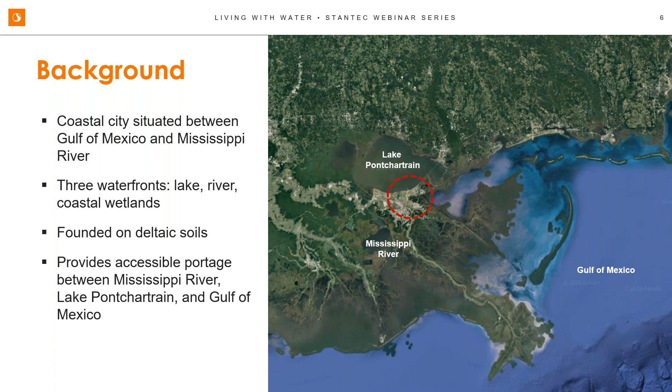Okay, and there's New Orleans on the map, you can see it in the red circle. It's surrounded by water with the Gulf of Mexico on one side, Lake Pontchartrain on the other, and then the Mississippi River that snakes through the city as well. The city was founded on deltaic soils, really soft marsh swampland, and we've dried up some of those swamps to create the city. Being surrounded by all these waterfronts really causes some challenges for the city, and over the years it's been the Mississippi River or hurricanes that have posed a lot of challenge to the city, with flooding events and disasters.

Just to give you an idea of the terrain, on one side's the Mississippi, you see Lake Pontchartrain on the other side, and basically New Orleans is in a big bowl. It's below sea level, at times 10 to 15 feet below. You can see where the blue-green corridors of the Gentilly Resilience District lie, at one of the lowest parts of the city. The whole city is protected by flood walls and levees along the Mississippi River and Lake Pontchartrain. Over the years, when a disaster happens, you get a Mississippi River flood or a hurricane that surges the lake, and it fills the bowl. When we've had breakages, those disasters have happened, and we've built higher and made the system more resilient.

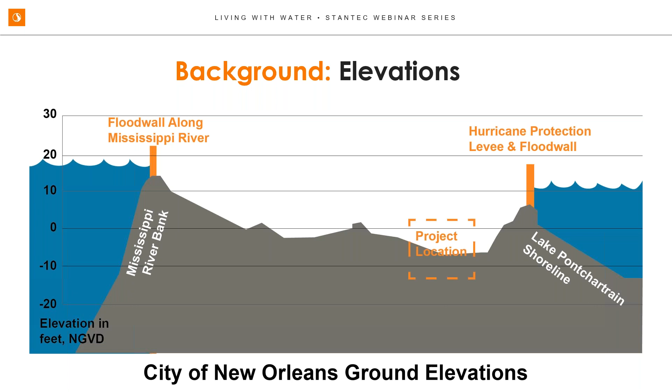In the 20th century, a drainage system was built with pumps, levees, and canals, allowing development of land that wasn't developable before and controlling flooding that was previously uncontrolled. These were giant pumps, some still in operation today, and New Orleans became the model for other areas on how to handle stormwater and control these large flood events. It allowed us to develop areas like Gentilly, which was really a swamp. It's one of the largest pumping systems in the world, over 50,000 CFS for the entire system, and it was strengthened over time.

But even with all this pumping capacity and these giant pumps, the system can still be overwhelmed because New Orleans is in an area that gets really strong rain events. We get over 55 inches of rain per year, and some really intense storm events.

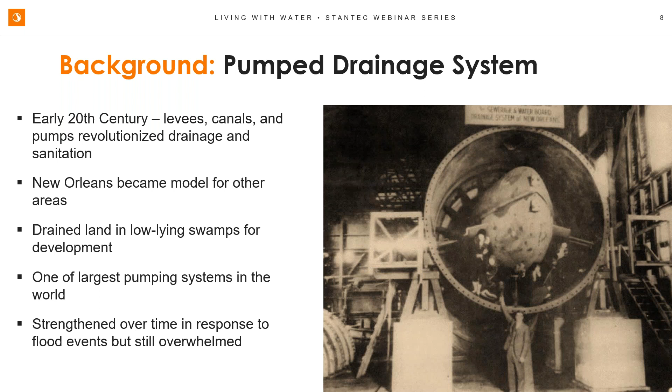As New Orleans was developed, the pumps, though powerful and able to evacuate a lot of water over time, can be overwhelmed by really intense storms, causing a lot of flooding and damage within the neighborhoods. What you're seeing here is a hydrograph of what the pump station sees. Before everything was developed, with roads, houses, and impervious areas, that blue line represents what the pumps would have normally seen. As things got developed and there were fewer places for water to go, you can see how the peak goes up. Part of the philosophy behind this project and green infrastructure in general is to get back to that natural hydrograph, reducing the peak and flooding by spreading out when the rain events happen and what the pump sees in the end.

One other thing that's really been a stressor to New Orleans over time is sea level rise, and more intense storm events. We've gotten really intense storm events, especially in the last 5 or 10 years. There was a storm event that gave us about 8 inches in 2 hours in a big part of the city, causing a lot of damage and flooding, and that was only a couple of years ago. So we've been seeing these 100-year, 500-year storms, which you wouldn't expect to see very often, occurring a lot more frequently.

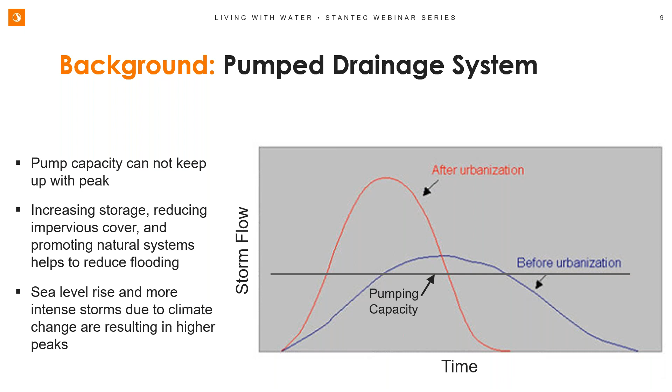In 2005, everything changed with Katrina. There were over 1,833 deaths of people who lost their lives. It's interesting because the evacuation was actually really successful, about 99% of people were evacuated. But the people left behind had nowhere to go, and in some cases there was about 15 feet of flooding in their neighborhoods, and they just couldn't get high enough in their houses. There were 50 levee breaches, and about $81 billion in property damages resulted from the storm. You can see right there on 17th Street, that was one of the big levee breaks.

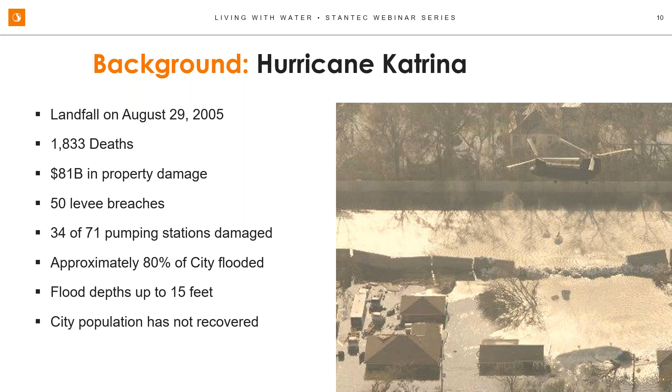The levee basically fell apart, and all the water from Lake Pontchartrain just poured right into the bowl and filled it up right up to sea level. Approximately 80% of the city was flooded, and the pumping system was basically useless because it was all flooded, the electrical systems were flooded, and the operators weren't able to operate the system.

This isn't a historical thing, we see this threat from hurricanes every season. This hurricane season we've been in the cone of uncertainty 8 times and got hit a couple times. This last one caused a lot of power damage with trees and branches falling. Luckily we didn't get hit with something major catastrophic, but our residents always live with the fear of when the next storm is coming. We know at one point one of these big storms is coming, so we always have to build things with resilience in mind.

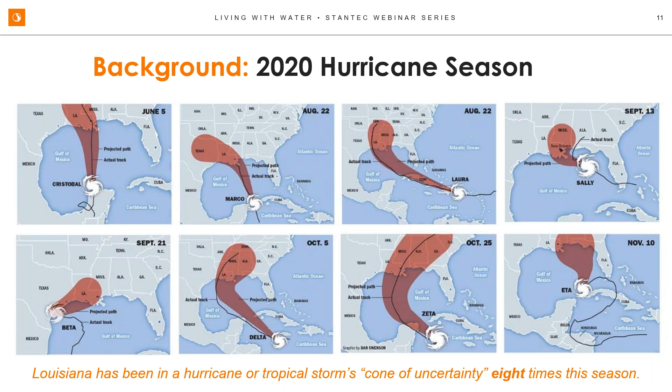Some of the physical stressors we have: the red line around the city is pretty much the city of New Orleans and the hurricane risk reduction system, which is a combination of levees, flood walls, and pump stations. There are some gates that close up, and all the rain that falls within the system needs to be pumped up and over the levees.

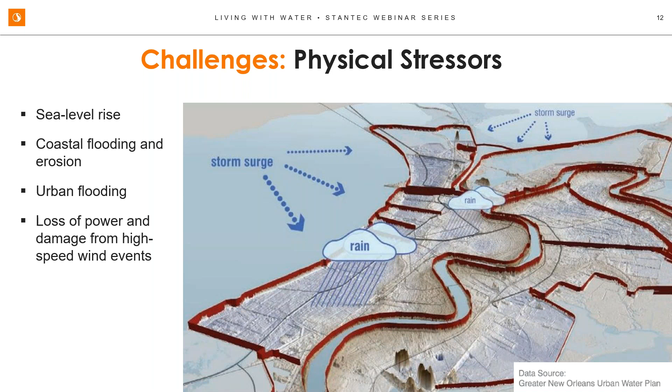Some of the stressors we have are sea level rise, coastal flooding and erosion. There are marshlands south of New Orleans which historically protected the city from hurricane surges, and that has been eaten away over time. There's urban flooding as these more frequent storms happen, and as I mentioned, loss of power. We spent a week and a half without power last month based on a hurricane that came through here, pretty much the entire city.

Another challenge we have is subsidence and the sinking delta soils. What we've always tried to do here in New Orleans is pump the water out as fast as possible to get it out so it doesn't cause flood damage. What that's caused is those marsh soils, those organic soils, to dry up, and as they dry up they cause subsidence. You can see it in our roads, our houses, even sidewalks that settle. That's a big issue we have to deal with, and this project tries to find solutions for that as well.

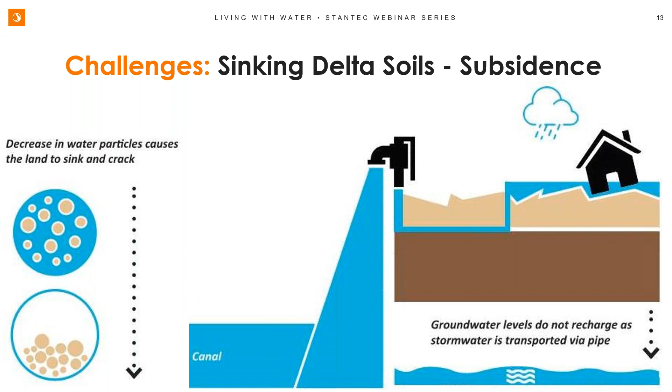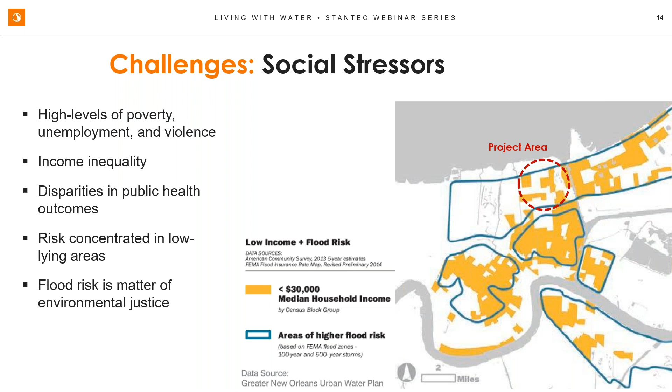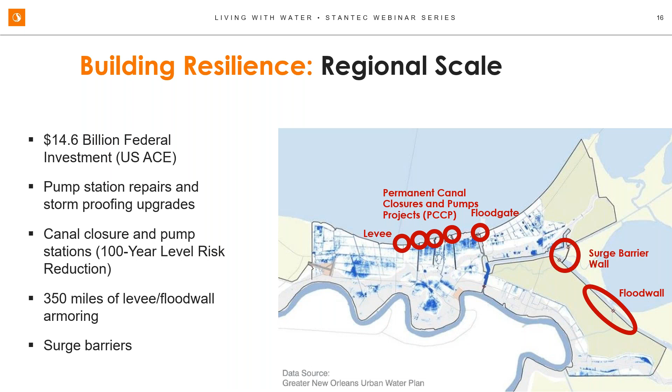Let's talk a little bit about building resilience. When Katrina hit, the Army Corps of Engineers and federal government put in $14.6 billion. The state and New Orleans also put in funding for smaller projects, but this was basically to reinforce that ring around the hurricane risk reduction system around New Orleans. About 350 miles of levee and flood wall were strengthened. There were canal closures—really all the levee breaks happened in those 3 canals you see under the red circles, 17th Street, Orleans, and London. The protection was pushed out to the lake to ensure that didn't happen again. There were also pump stations and other big projects done within that $14.6 billion, basically to build back stronger and have a higher level, 100-year level of risk reduction for the city, at a regional scale.

And to give you an idea of that capacity, that is a lot of water coming through. It's 3 big canals, drainage canals that drain the whole city, and that fills an Olympic-sized swimming pool in 4 seconds. So it's a lot of water.

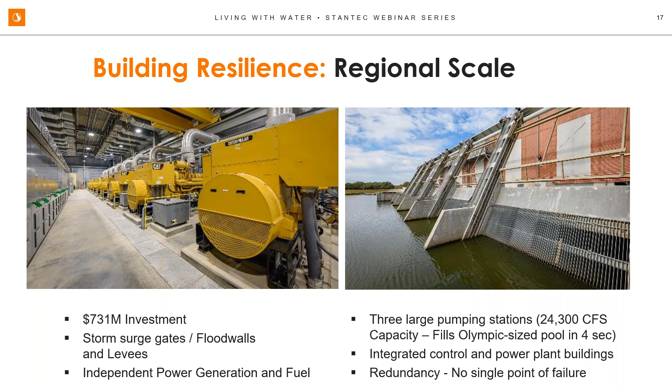These facilities were built to make sure that Katrina didn't happen again. They have independent power generation and fuel so the facility could be separate from the rest of the world for 5 days and operate. It has a lot of redundancy built in, and what we didn't want to have is a single point of failure. So all the electrical and mechanical systems have backups to make sure this facility could work when it's actually needed during a hurricane.

Go to the next slide.

But the city has been looking at alternate solutions and better ways of being resilient. One of the ways is moving from a completely gray system to a combination of gray and green infrastructure. I mentioned that things were being pumped out as quick as they came in. Well, green infrastructure slows things down and tries to smooth out that hydrograph at the peak of the storm by providing storage on the inside of the system.

One project that is about to finalize construction is Hagan Lafitte, and it includes a combination of gray system piping and reallocation of the basins plus green infrastructure to provide a complete system. We've seen reductions of flooding up to 4 feet in what's modeled. And that includes porous pavement, rain gardens, park upgrades, basically providing pervious areas wherever the neighborhood offers opportunities.

Go to the next slide.

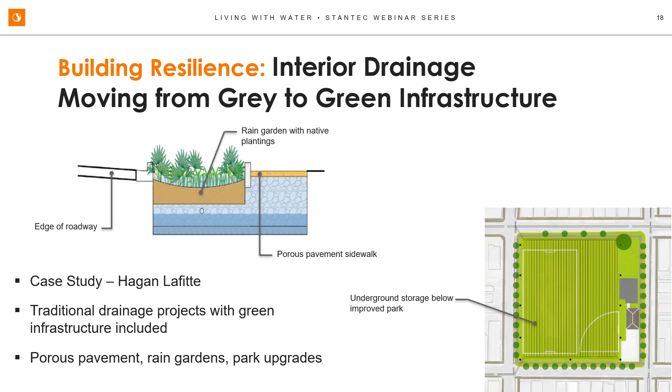So let's talk a little bit about the plan in action and blue-green corridors and how it relates. That's kind of giving you a little bit of history and background. Now, the city applied for NDRC, National Disaster Resilience Competition. This is a competitive grant funding to recover from past disasters. So in order to qualify, you needed to have had a past disaster happen in your city. But the focus of the grant is to improve the ability to withstand future events, future hurricanes, and to be resilient, to come back quicker.

And it really focused on the physical adaptation, which are physical improvements we can make to the system, but also on economic opportunity and on social cohesion. So it's a HUD grant, and it's not just flood reduction. It focuses on really bringing the community back and focusing in on different aspects of resilience.

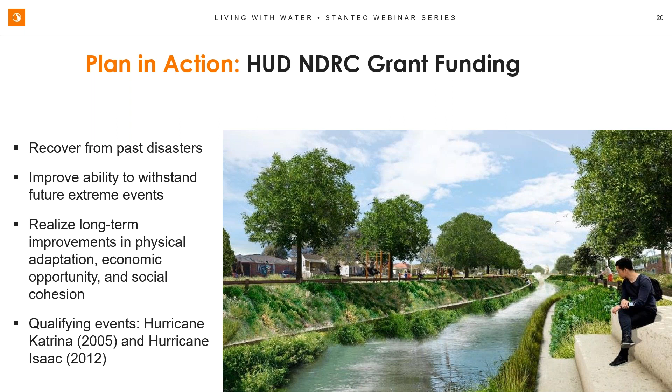If you go to the next slide.

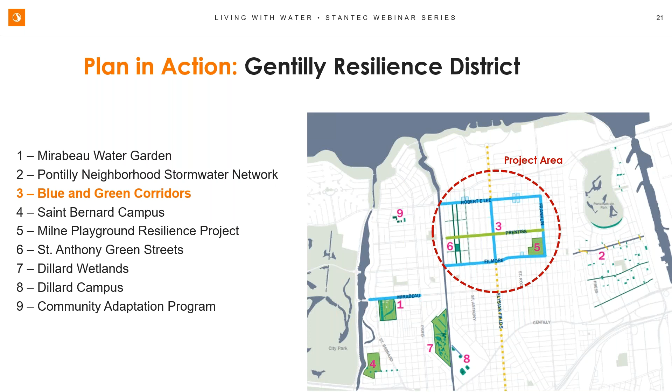If you go to the next one, some of the goals that were provided in the application and the program.

The biggest goal is to address the flooding and also to promote infiltration and groundwater recharge, which are ways to help with the subsidence problem. So you want to try to get the water and slow it down, create storage in the system, and reintroduce it back into the aquifer.

But HUD also had other goals. It wasn't just the drainage, it was public health goals, to provide access to parks, provide recreation, amenities, health stations for people to be able to get out and exercise.

Economic goals, we wanted to have this community thrive again, right? Develop economic growth, have opportunities for people that maybe left from Katrina to want to come back because it's such a great place.

And then urban heat goals, also create shade and reduce heat island effect. New Orleans, it's summer like 9 months out of the year. So heat island effect is big in some of these areas that are overdeveloped.

And then also cultural goals. The program wants to capitalize on the rich culture that New Orleans has and bring some of that culture into these parks, into these installations, and also provide some interactive educational opportunities so they can understand what's happening with their drainage or some of the other installations that are going in.

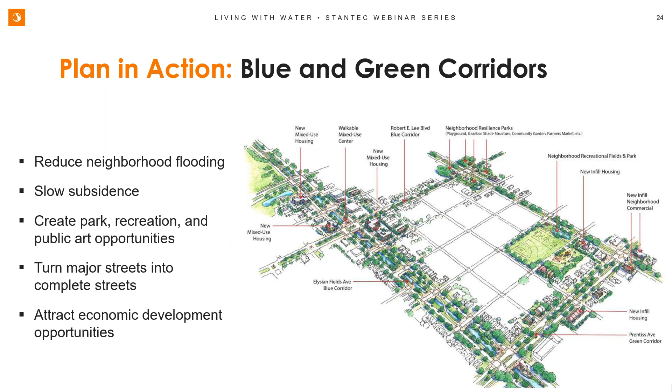So really this project is a shift in thinking of how can we use nature-based practices to capture the water where it falls and promote infiltration back into the ground, while creating park and neighborhood amenities, providing safer routes for pedestrians and bicyclists in complete street thinking, and attracting economic development opportunities. So the intent is to manage water more successfully and to maximize the funding to provide the most amount of benefits for the community.

Blue and Green Corridors is the largest of the Gentilly resiliency projects. It's a $40 million construction budget with a significant amount of roadway. On the screen you see Robert E. Lee Boulevard and Filmore Avenue, the east-west streets, roughly between London Avenue Canal - one of the canals that had a severe issue during Katrina - to Franklin Avenue on the east, and then Elysian Fields Avenue going in the north-south direction. That's about 3 miles of linear corridors that we have to work with.

We're also looking at 2 stormwater parks at Robert E. Lee and St. Anthony Avenue, and then 4 stormwater parks at St. Roch and Robert E. Lee Boulevard. Currently those are vacant grass lots. There are some trees on them that we'll preserve, but with those lots we'll really be looking at ways to use strategic storage to work within the system.

In addition to flood management, these corridors will be used as stormwater management facilities - I'll go into how we're doing that in a few minutes. But beyond that, we're looking at how we can make the most of the money we have. Within these corridors there will be improved planting, so instead of turf we're putting back grasses and shrubs and practices that promote infiltration into the ground, using nature to reduce the volume of water while also providing a water quality benefit. We're introducing lots of trees, playgrounds, and fitness areas, all with the intent of creating an amenity within a 10-minute walk for everybody in the neighborhood, not just at the stormwater parks.

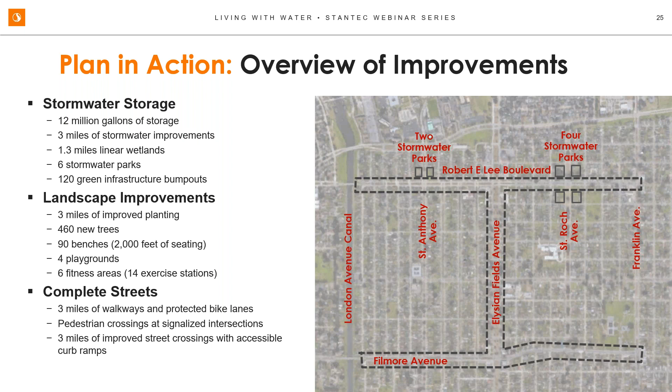As Dan mentioned, Gentilly is an area within New Orleans that has seen tons of flooding over the years, not just from these large hurricanes we've been seeing so much, but really from daily storm events as well. They get over 55, 60 inches of rainfall a year. So really it's looking at how can we deal with water in this bowl-shaped community that's sinking more and more every day.

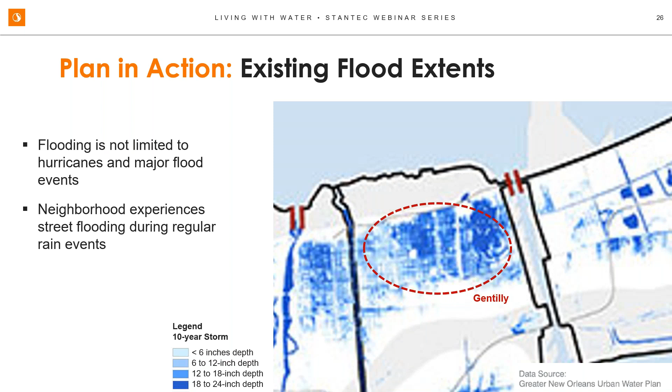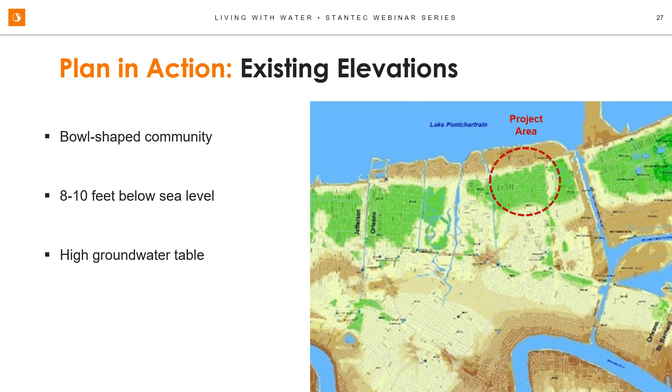This is a map showing the topography of the area. The darker green areas show the areas that are furthest below sea level. Gentilly in general is about 8 to 10 feet below sea level and surrounded by levees and flood walls on all sides. They're also dealing with a high groundwater table, one that's regulated by these pumping facilities. We see groundwater maybe between 4 and 6 feet below surface grade. So that really presents a challenge as well: how do we strategically collect this rainwater and get it back into the ground?

The pumping system in New Orleans is very specific to this area. Again, it's that bowl-shaped community with perimeter controls around the outside. So when we get rain from a regular storm event, the issue becomes how do we deal with that rain? In the existing model, water is collected in catch basins or inlets on the street, routed into small pipes, then into larger pipes, into underground canals, Prentiss Avenue being one of them, and then eventually making its way to a pump station where it's pumped up into an above ground canal, in this case the London Avenue Canal, and directed north to Lake Pontchartrain. So it's really a single source stormwater management system.

And this shift in thinking that we're looking at is how can we collect water where it falls and strategically use that storage to prevent strain on the pumping system? So how can we remove impervious cover and promote infiltration into the ground so that water doesn't make its way into the storm network system?

Again, on the right side of the screen is an approximate area of the project where we're really looking at finding strategic ways to pull that water out of the system during the peak of the storm event. As Dan mentioned with that hydrograph, really the peak is what we're trying to manage here, because that's what's resulting in this nuisance flooding that we see so often. So if we can create these strategic storage areas that temporarily hold the water, there's a lot of value in that, so they can be released back into the storm system after the peak of the storm has passed.

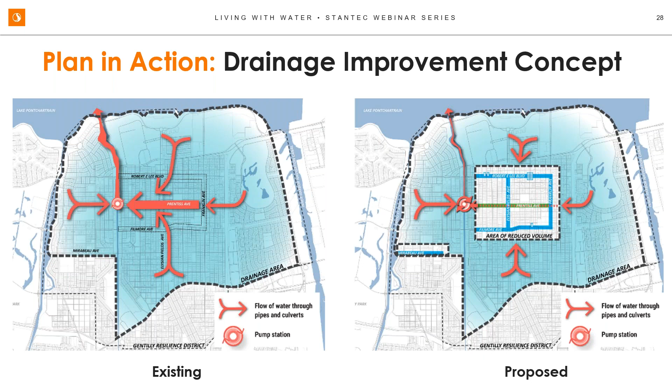So we've talked about blue and green corridors as the project name, but I want to talk through what this really means. Blue corridor is really a new concept: the idea of a permanent pool of water that's used for flood management.

In the top there, the existing condition really shows clearly why we have an issue here. In most cases in New Orleans, there are streets divided by medians or neutral grounds, grassed areas that are mounded and push the water back toward the edge of the street, where it's collected in inlets and catch basins and then routed to those pump stations. Unfortunately, the neutral grounds don't really provide much benefit for us here. They are pervious, which is good, and that promotes a little infiltration back into the ground, but really they're not used in any way for flood management.

In our proposed design, what we're planning to do is shift the water from the inlets back into the median, so excavate 10, 12 feet below the existing grade to really create a permanent pool of water, a depth of maybe 4 to 6 feet, and then provide a little bit of freeboard on top of that, another 4 feet or so, to handle those flood waters.

Now, the interesting thing here is that it's not just a drainage ditch. It's really something we're trying to create an amenity out of, to tie down on those triple bottom line benefits that Dan mentioned. So flood management, but also looking at the social value of adding a waterway into an area that — New Orleans is interesting because they're surrounded by water on all sides, and the city has its identity built on water. But once you're inside these neighborhoods, you realize you're surrounded by concrete levees and flood walls all over the place. There really isn't that feel or sense of water. So this is really an innovative and creative way to invite water back into the community.

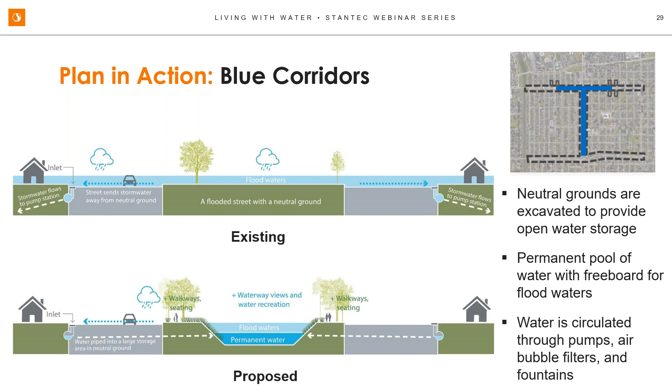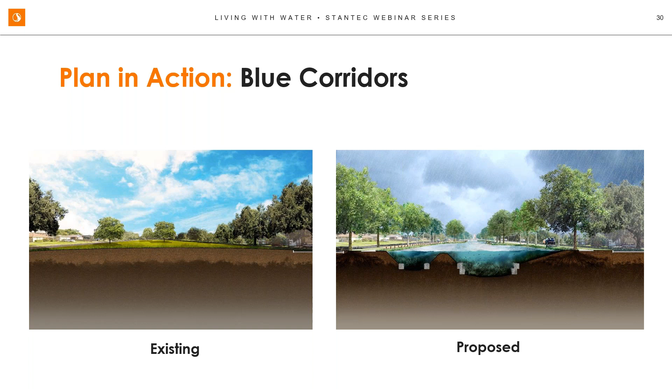Green corridors are corridors that we're retrofitting with green infrastructure technology. In these cases, they weren't able to be blue corridors based on the width of the existing neutral ground or based on existing utility conflicts that prevented us from digging down quite as deep as we did on Elysian Fields.

Again, in the existing condition, the neutral ground is slightly elevated and is pushing water back to the edge of the roadway, where it's collected and sent to the pump station.

On these streets, what we're looking to do is expand the pervious area to the greatest extent. Part of these streets were originally two lanes, and through our traffic analysis, we saw that they didn't need to be two lanes everywhere. The roadway widths were actually quite wide and didn't need to be that wide. So we took advantage of some of those areas to create road diets, reducing the width of the roadway to make room for that additional green space we were seeking.

Green infrastructure practices really thrive on the concept of capturing rainwater and managing it where it falls, to keep it out of the stormwater management system. This is particularly important in these smaller storm events where we're really seeing flood issues in the neighborhood. Green infrastructure is perfect for this because it's designed for that smaller storm event.

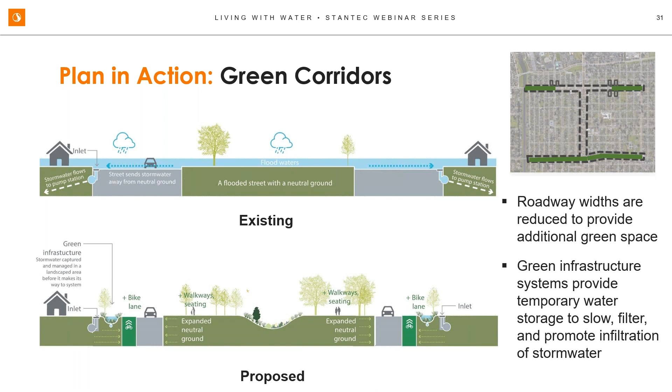The intent is to promote infiltration back into the ground. You create these temporary storage areas that are able to temporarily hold the water enough so it has time to filter through the soil back into the groundwater. What you see here is that while they create slight little depressions able to hold the water, in normal conditions they would be dry.

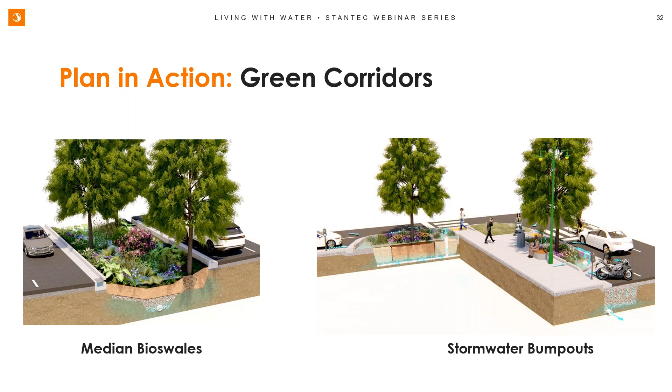Not only does this provide stormwater benefits, capturing the water as it comes down the street prior to reaching an existing inlet structure, and promoting infiltration back into the ground while providing a site amenity and water quality and air quality benefits — it's also being used as a transportation improvement, bumping out to reduce the pedestrian crossing distance across the street. This makes cars slow down because the road narrows in those locations, and it also makes pedestrians feel safer because the distance is shorter for them to cross.

We're also looking at parks with co-benefits. These are the 4 lots I mentioned earlier at St. Roch and St. Anthony, and Robert E. Lee Boulevard—vacant parcels taken over by the city over the years. The intent is to look at this with a triple bottom line approach: how can we address flooding, but also add site amenities to build social and environmental awareness and cohesion in the neighborhood.

These parks will have a mixture of open storage. Two parks will have water features with a permanent pool of water, and the other two will have more green infrastructure or temporary storage that can be flexible space—providing a slight depression in the ground to capture and filter stormwater runoff. During a dry event, they could also be used as seating areas or recreational space. It's really making the best use of the space we have to create the most benefit for the community.

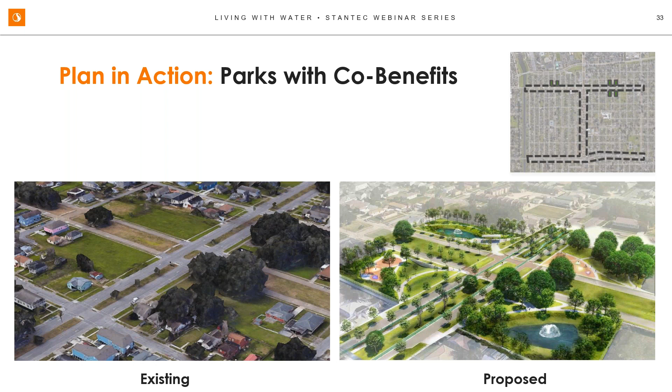We're also very focused on creating amenities throughout the corridor. We've done a lot of programming studies on how these corridors can become links to existing destinations. In doing so, we're asking how can we make these roads feel safer, and provide better walkways and safer bike lanes so everybody feels comfortable using them to get to existing destinations. We also looked at how these corridors can become destinations in themselves.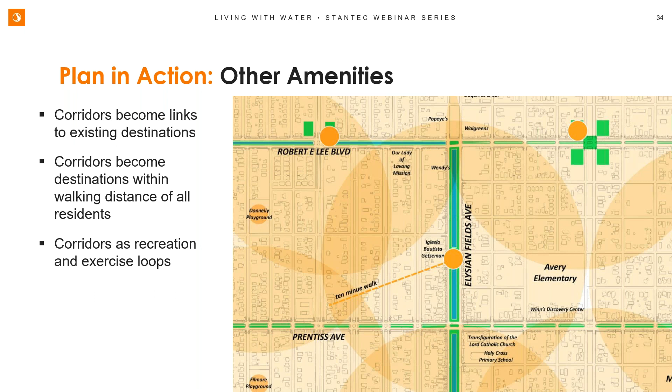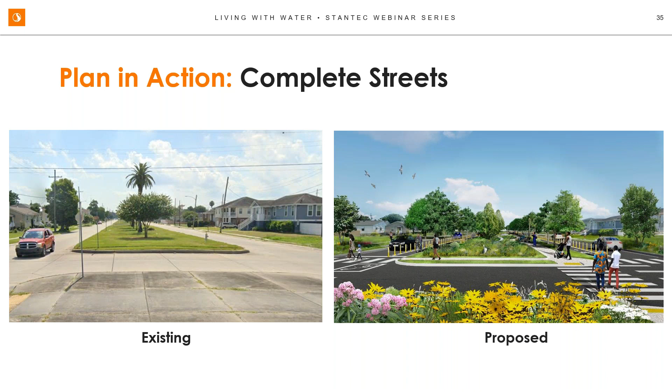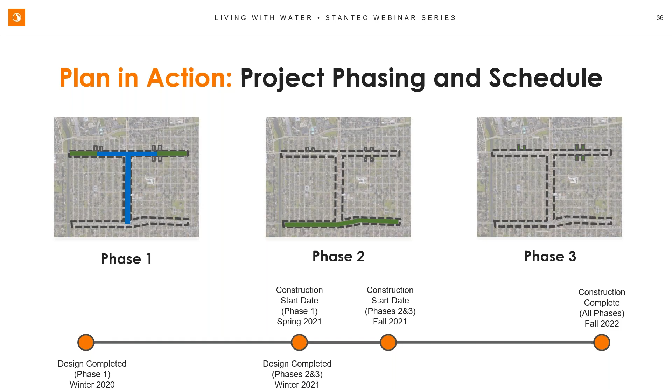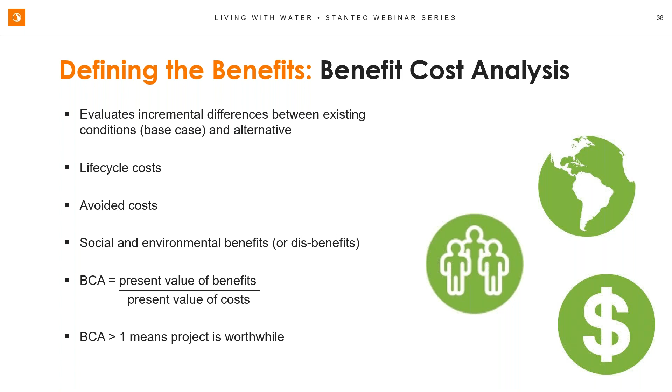Now, the interesting thing with HUD funding is that it really does look at this triple bottom line approach, whereas other funding typically only looks at flood damage reduction. With that said, flood damage reduction is the biggest benefit of this project.

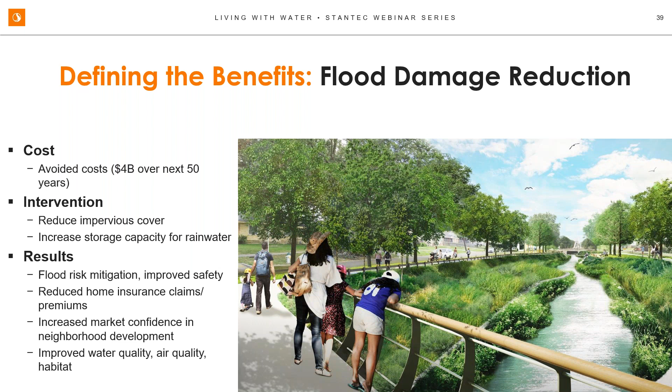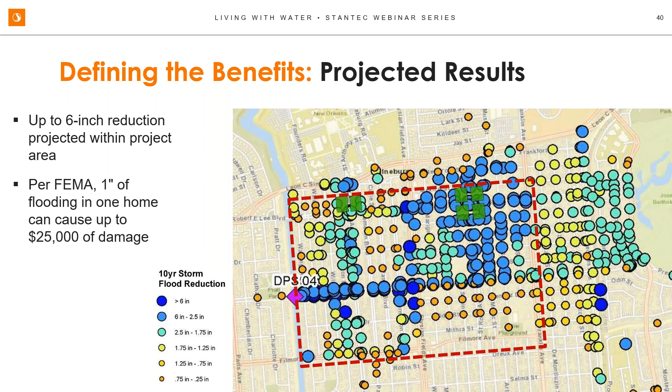And while 6 inches might not seem like a lot, per FEMA, 1 inch of flooding in one home can cause up to $25,000 of damage. If you just think about stepping into your car, that's only a few inches off of the ground. So it's really the difference between saving your car. It could be a step up to your house, so water getting into your house. So 6 inches is very, very significant.

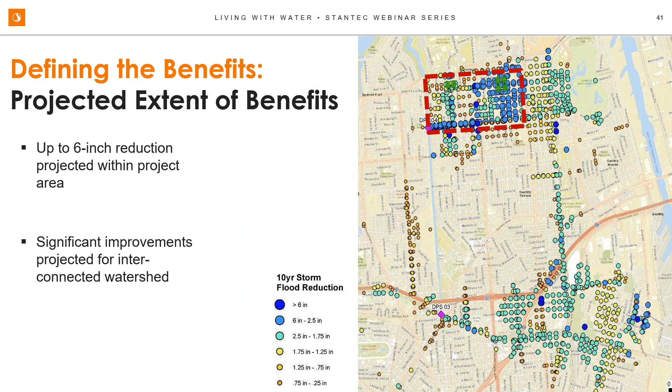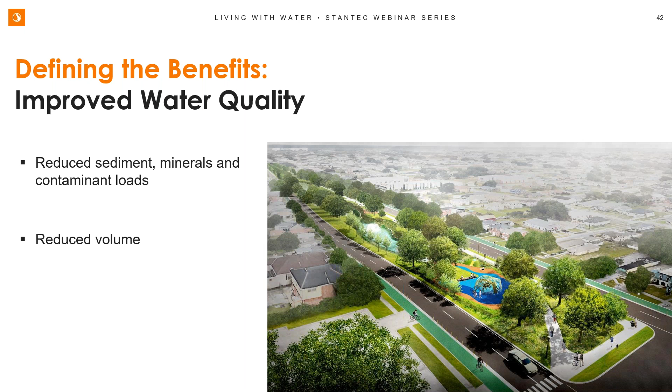We're also improving water quality. As water quality comes with a concentration and a volume of water that we're trying to deal with, we're reducing the volume by strategically storing it in these practices that are able to infiltrate it into the ground, really giving it a chance to use nature as the best water quality filter. By filtering it through these soil practices, we're reducing the sediment, mineral, and contaminant from the stormwater runoff that we're getting from the roadways that we don't want in our stormwater system. We're using nature to filter it through that high quality soil before it's infiltrated back into the ground, or in some cases put back into the stormwater management system.

Subsidence reduction is a very, very big factor on this project as well. As Dan mentioned, this project is overlaid on delta soils, which have that ability like a sponge. When they're wet, they retain their shape, but as the sponge dries out, as those soils dry out, you get a lot of settling and cracking. So not only do they see roadway cracking, they're settling where residents have to pour sand underneath their foundations.

These are all slab on grade without basements, and it's pretty common that residents have to put sand underneath of their foundations to prevent their house from settling. Not only that, all of the utility cracks that you see and upgrades that need to happen as a result of this uneven settlement that's happening. The city has estimated that there's about $2 billion over the next 50 years as a result of subsidence in this neighborhood.

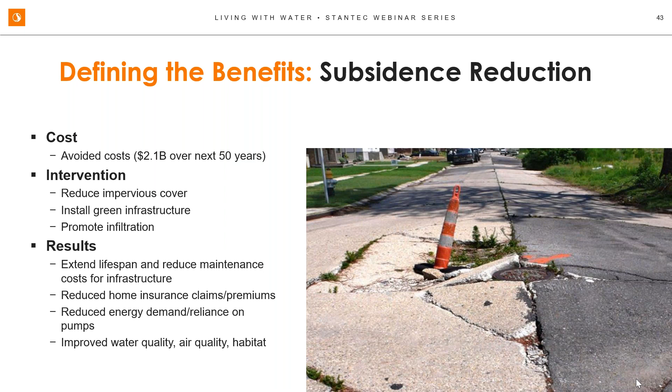So really looking at systems that promote infiltration and keep those soils wet are how we're able to reduce subsidence. The results really are looking at the avoided cost of reducing the roadway repaving and repairing those stormwater lines. So it's looking at decreasing the operation and maintenance and the timing between when those roadways have to be replaced. Again, we're looking at water quality, air quality, and habitat benefits as well, all by promoting infiltration and installing these green infrastructure practices.

And finally, improved quality of life.

I think it's been a really fun time working on this project, really taking a hard look at what we can do to maximize the benefits.

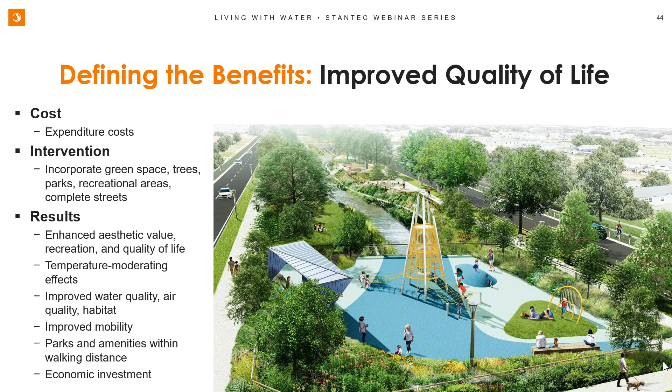Wrapping up with the benefit cost analysis, I mentioned how that looks at the present value of benefits over the present value of costs. You can see on the right side of the screen how that comes together. We used a program called AutoCase, in addition to some of our internal modeling for flood and subsidence, to develop this benefit cost analysis.

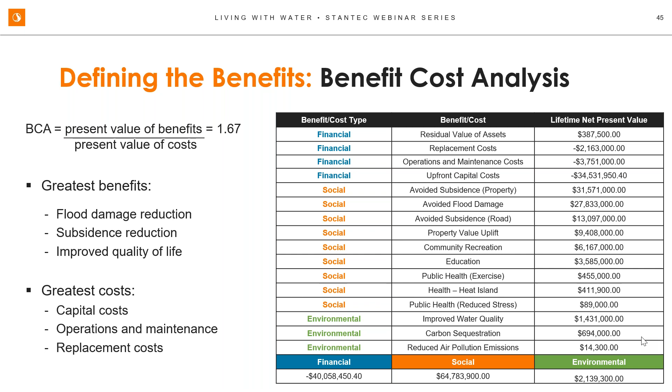Our results show that the BCA ratio is 1.67, which is amazing. That means for every dollar spent, there's $1.67 in benefits. So really this project is well beyond worthwhile to do. The greatest benefits we saw were from flood damage reduction, subsidence reduction, and improved quality of life. The greatest costs, not surprisingly, are the capital costs to install the project, the operation and maintenance costs to maintain it, and the replacement cost as these assets get older and need to be repaired or replaced.

Okay, then I'll pass it back to Dan.

Thank you, Bernadette. Just to talk a little more about those benefits too—there are some health benefits in there as well that we calculated based on the additional physical activity people could get in these bike lanes, walking areas, exercise stations, and parks. It's really focused on getting people outdoors, providing enough shade in some of these walkways to allow them to enjoy this for a larger time of the year, and reducing that heat island effect that heats up these neighborhoods and sometimes makes them so hot it's unbearable. So this tries to provide that shade to make it more usable.

In conclusion, Bernadette did a great job describing all the components of the blue-green corridors. But those types of solutions have to be part of any drainage plan—any project that cities, wherever they are, undertake when they have these challenges of stormwater and other social and environmental challenges must incorporate them. These newer technologies or ways of thinking can be adapted to any community, and we've done projects all over the U.S. in different soils, different drainage conditions, with different water quality needs, heat, and different community needs. So you really just have to customize the approach to your specific needs and what that project is.

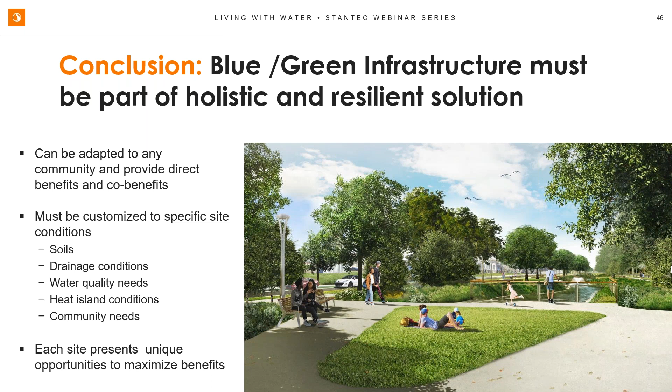So if you have any questions on how to implement one of these green infrastructure or blue infrastructure solutions, I think Bernadette has the contact information there for her and me. You can ask us any questions you want, or lean on some of the experiences we've had in New Orleans and other areas in the country. So with that, thank you very much, and if you have any questions, we'll be happy to answer them.